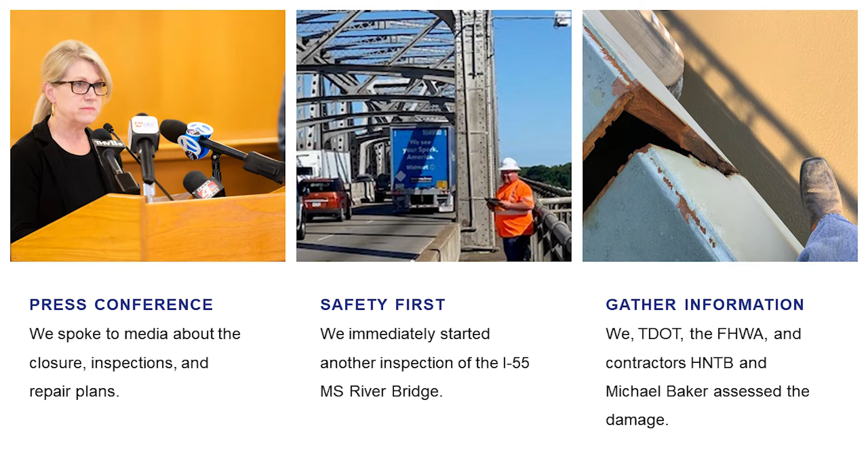The fracture of the I-40 bridge is a story that I'm sure piqued your interest, and I'm looking forward to telling the story from my perspective. This has been an event that I'll not soon forget and likely get to tell many times. It presented us with many challenges, and it showed us how things can work out successfully when teamwork and true collaboration take over. So to bring everyone up to date, as you know, on May 11th of this year, a fracture was discovered in one of the tie girders by our consultant inspection team, Michael Baker International. They were inspecting the truss and the cable portions of the tied arch spans of this bridge and found this fracture. The bridge was immediately closed to traffic.

The I-55 River Bridge, which we call the Old Bridge there in West Memphis, would be forced to carry the load of both interstates, a combined average daily traffic of about 87,000 vehicles with just 4 lanes of travel. So we go from 10 lanes of travel down to 4 lanes. Although ARDOT and TDOT don't have the authority to close river traffic, the Coast Guard closed barge traffic due to the level of risk and concern over the integrity of the bridge. As expected, barge traffic quickly backed up, including hundreds of barges with important cargo and fuel. I never thought I'd be dealing with a barge queue. I'm used to traffic queues, but now we got barge queues, and so that was pretty crazy.

We quickly scheduled a press conference and let the public know what had occurred and what we were doing to perform investigations into the fracture. ARDOT also immediately began another inspection of the I-55 bridge, the old bridge, to ensure it was safe for traffic. And within hours, on May 11th, we began forming a team of experts with FHWA, ARDOT, TDOT, our consultants, HNTB, and Michael Baker, and this team began assessing the damage. In fact, it was a Tuesday, about 2 o'clock, we got the call from Mike about this, and by the next morning at daylight, of course, Michael Baker teams were already there because they found the fracture, but I know Mike and Stuart were there before daylight. HNTB was called in, flew in overnight, and they were there at daylight the next morning to get this assessment started.

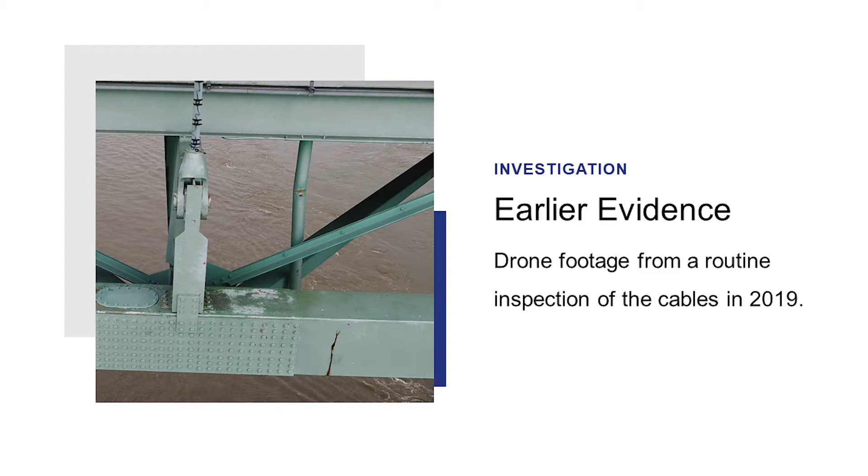A major key for ARDOT was to be transparent up front, to get information out and let the public know what was happening. So during the course of our investigation early on, we did find evidence of the bridge fracture from 2019 drone footage. We began investigating the cause of the apparent oversight of the fracture because we had inspected it since the time of this footage. So our investigation initially determined that the bridge inspector who conducted the inspection in 2019 and 2020 did fail to carry out their responsibilities correctly, and the employee was terminated.

We know this employee did not inspect this bridge as he was trained to do, but we also have to accept the fact that we've got to make improvements in our process. This incident, however, is not representative of our bridge inspection program.

Just in the few months that I've been in my current role, I'm sure not an expert in statewide heavy bridge, but I've known Mike and Stewart a long time, and I've got to know Andy Nanaman and Kevin Weston, who's, I believe, here today, and getting to see what these younger guys are doing and the technologies, to see the statewide repair teams, as I'm sure all you DOTs and consultants have seen, the amazing stuff that these teams that Stewart leads do every day.

Brad Smithy, I think, is here from our District 10, and unfortunately he's dealing with a lot of bridges almost on a weekly basis, having to close bridges, call in a team, take care of these things, whether it be heat straightening, pin repairs or complete deck replacements, and get that bridge back open in days. It's just amazing what they do.

But again, back to the bridge inspection teams, one of my closest friends at ARDOT retired about a week ago after 30-something years, but he was a bridge inspector for the majority of his career. And he was one of the persons instrumental in training me when I started in the field, and he taught me how to read plans. He showed me what I was doing wrong, where we formed things up wrong, and he served us faithfully as a bridge inspector for many years, and then went on to lead several maintenance teams. And he's representative of the many amazing bridge inspectors we have in the state.

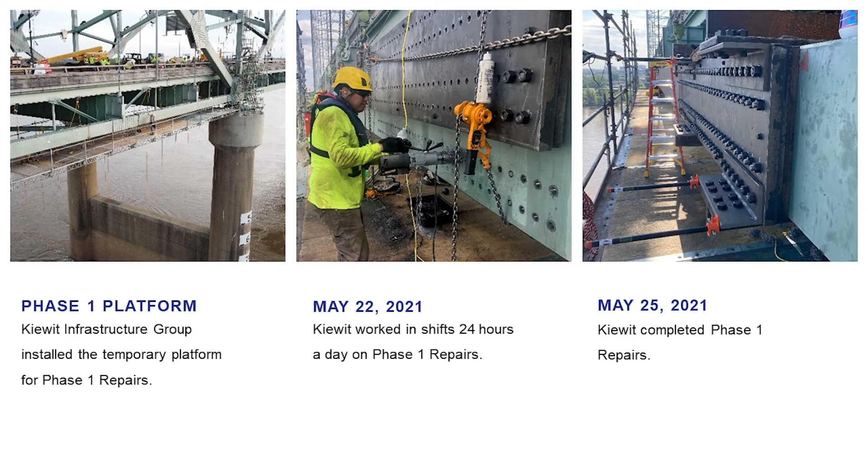They immediately mobilized crews and equipment to the site while steel plating was being fabricated. Kiewit worked 24 hours a day through the week, installing platforms, and then through the next weekend, drilling and bolting hundreds of holes on the outside and back plates, all to get this phase 1 repair to ensure the stability of the bridge.

The phase 1 repair was completed on May 25th, providing that additional confidence that the bridge was stable. So Kiewit Construction, when they were brought on in the design process, what was neat is they worked closely with the DOTs, with our consultants, and Kiewit's perspective from a constructability standpoint was a key factor. And the resident engineers and the guys that have worked as field engineers know that having that constructability standpoint is always very important, and it just makes everything go better.

And so it was just neat to see the contractor and the consultant working together side by side and coming up and tweaking final designs very quickly to provide the fastest and safest repair. So sitting from my vantage point, that was just amazing to see. They worked as one team, they put pride to the side, and they accomplished the task.

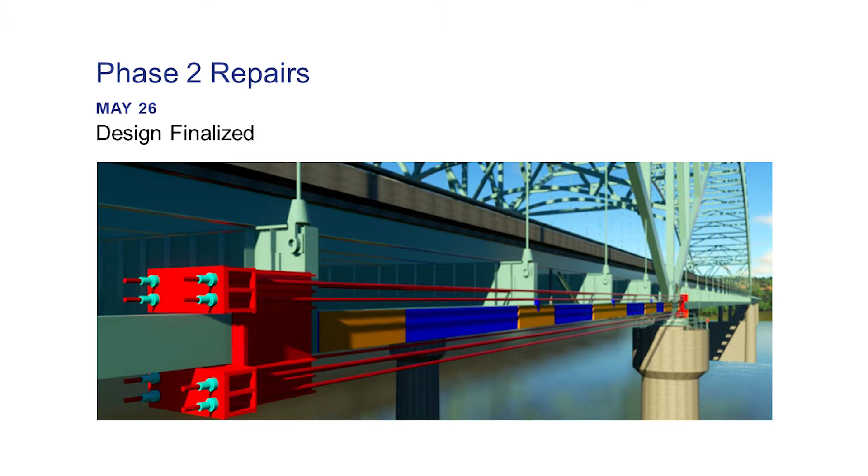This attached image shows the phase 2 plating. Orange and blue there's the plating over the old tie girder, the post-tensioning system that was used to reduce the load and engage the new plates compositely. So the structural engineering, the design, the execution of this phase 1, and then moving on to phase 2 repairs, and then we actually got into a phase 3. This is all very intriguing stuff.

Therefore, I'm going to leave the nuts and the bolts, pun intended, to Mr. Aaron Stover with Michael Baker to further explain that amazing feat in the next presentation. But before I do, I just want to explain a few more things. So while the repairs were going on, of course, we still had the rest of a bridge to inspect. Once phase 1 was complete and the bridge was stabilized, it allowed us to begin re-inspecting the remainder of the bridge.

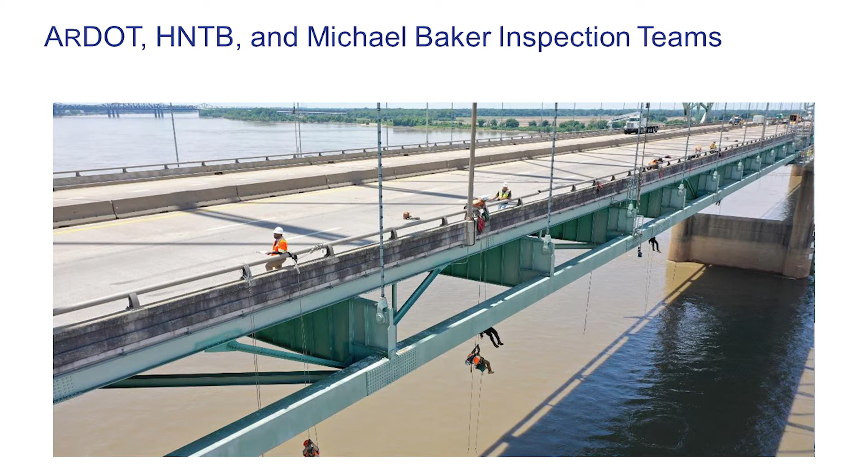ARDOT teams completed inspections of the remaining bridge outside the tied arch spans, while HNTB teams performed inspection of the deck down, and Michael Baker teams were completing their inspection of the trusses and cables. ARDOT also provided one of our Aspen aerial snooper underbridge inspection units to accelerate the work while other teams accessed the bridge by ropes. And you can see in the picture there in the back corner the Aspen there.

And so I don't know, it may not be a record, but this may have been the most inspectors on one bridge at one time. And we had people from all over the country hanging all over this bridge, including a majority of our staff. Because again, it's not just these two arch spans, which is a huge amount, but we got 2 miles of bridge outside of that, and we wanted to do a thorough inspection to make sure everything was in good shape.

While there was much attention getting the I-40 bridge re-inspected and repaired, we also had to focus on maintaining traffic flow across this 55 bridge. Traffic backups of 5 miles plus in each direction on I-40 and I-55 occurred on most days and continued throughout the peak daytime hours. Trips across the river were experiencing average delays of 1 hour. With any crashes or stalled vehicles, we had multi-hour delays. This would cause drivers to attempt to divert through town, causing further problems for local highways and streets.

I think they were doing the math that it was $2 million plus a day in road user costs just for the trucking industry alone, not to mention the impacts to the national and local economy. It was pretty rough. I know the ARDOT district forces worked quickly to add motorist assistance patrol vehicles, assist stranded motorists, clear stalled vehicles. Highway police units were working tirelessly to protect the queue with blue lights. And I know a couple of our guys here, Matt Emberton and Jeff Adams, they live this daily in West Memphis and had to deal with this traffic, and it was pretty brutal.

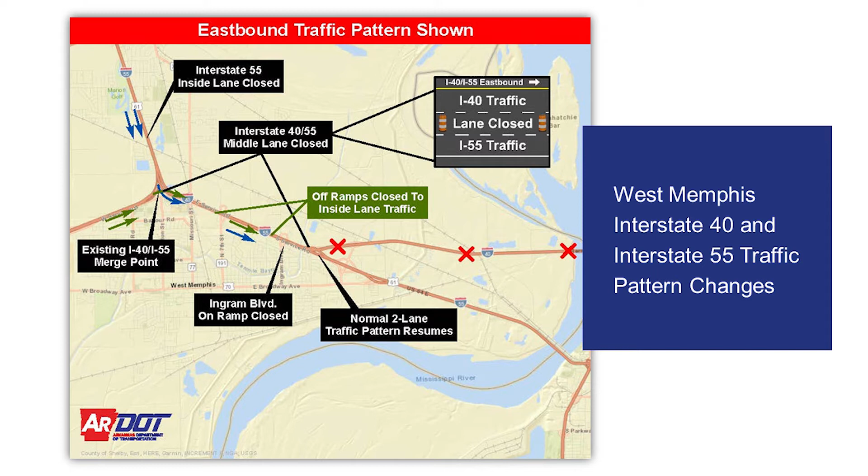As our engineers got together, the challenge was we were having the on and off ramp choke points, and we did something a little bit outside of the box where, as you can see up here, we had 3 lanes in the middle, and you would think, well, we don't want to reduce any capacity, but we actually did that very thing. So we shut down 40 to 1 lane before the west split. We shut 55 down to 1 lane before the split.

When we brought them in together, instead of merging them and all that ramp action with everybody in town, we actually separated the 2 lanes, closed the middle lane. It did take away some capacity, but it kept things flowing, and then we brought them into 2 lanes and across the river. And so we weren't really sure this would work, and the pressure was really high.

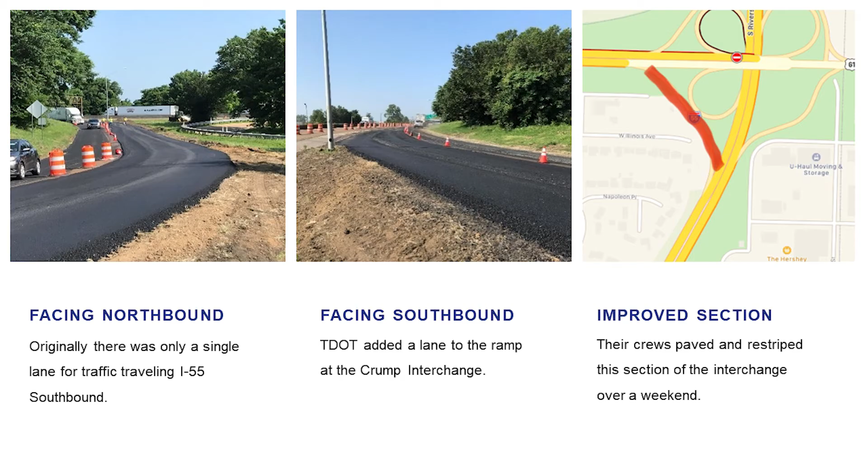At the same time, you've got TDOT there with that 1-lane Crump interchange. We knew that was one of the key players. And so TDOT had been working on moving utilities, widening drainage structures. Again, this wasn't a construction job. This was maintenance forces just in emergency action mode, widening out, and they were able to get a 2nd lane put in there and paved so that we could at least get that 2 lanes on I-55.

So the good thing is we get our traffic pattern changes implemented on the Arkansas side. The bad news is the day we introduced the new traffic changes, TDOT's in the middle of the road paving. And again, it's not their fault. They had to get this done, but that was the worst day we saw yet. So traffic turned into just a parking lot.

And of course, all of those engineers that come out of the woodwork said, we're idiots, we don't know what we're doing. The director's getting pressure. I think she said that was one of the worst days she had as director. Of course, the pressure's a little high on me and my buddies over in District 1, like, what in the world are you thinking? But we were still confident that we'd made the right decision. Our traffic changes were based on solid engineering judgment, and we knew they would work.

So we were trying to explain that, hey, give it a chance. Let's let TDOT get out of the way, and let's see if our changes worked. And so there was a lot of confidence that the director had to instill in us to not pull the plug on this, and we were very close. I'm proud to say that it did work. We saw much improved traffic flow with these changes.

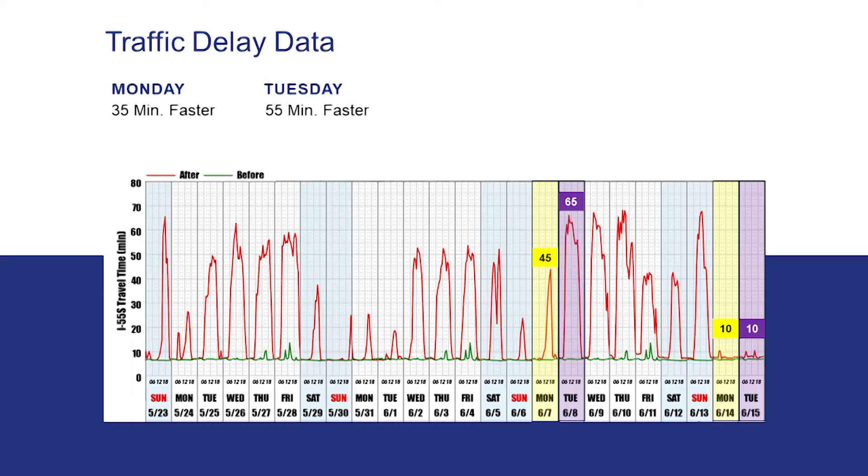And actually these traffic delays, that peaks out about 70, 80 minutes, but really that's just to a certain sensor. And so when the delays go back 5 miles, it doesn't even pick up on the chart. So we were seeing outrageous delays. But once TDOT got their work done, that was Friday, Saturday, Sunday. Actually, we let them take off a little bit Friday early, and the peak hours weren't bad. Monday morning is when we really got to reveal, hey, here's what our changes are.

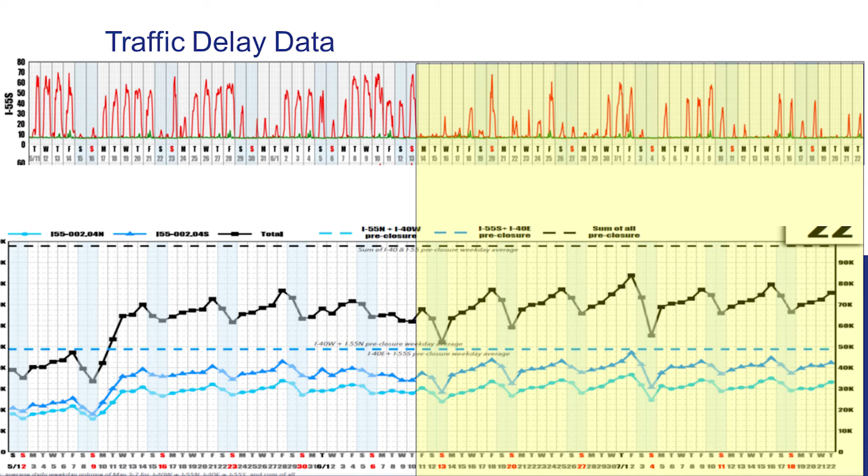And then you got throughput. So this bottom chart is actually showing throughput. So you've got 87,000 vehicles a day plus, of course, with 5-hour delays, trucks and vehicles are going to reroute. They were going to Caruthersville, they were going to Helena, they were going to Greenville. They were finding any way around, and so the traffic volumes had dropped here in the 60,000 range. So 20+ thousand vehicles were finding a way around and costing a lot of money. Once our changes were implemented, the beauty of it is, okay, now there's no congestion. Well, now 20-something thousand vehicles are all coming back into this. And so, but it still worked.

And once our changes were made, you could kind of see the peaks climbing, and we got back up over 80,000 vehicles. In fact, on July 1st there, we peaked out almost at full capacity, even had a little bit of delay, but the throughput was a record throughput. So it was just amazing what happened there. But even what was more amazing was reopening this bridge. So on July 29th, we did some load testing, got that completed. Crews removed platforms, demobilized, and we opened eastbound lanes on July 31st, westbound on August 2nd, about an 83-day closure.

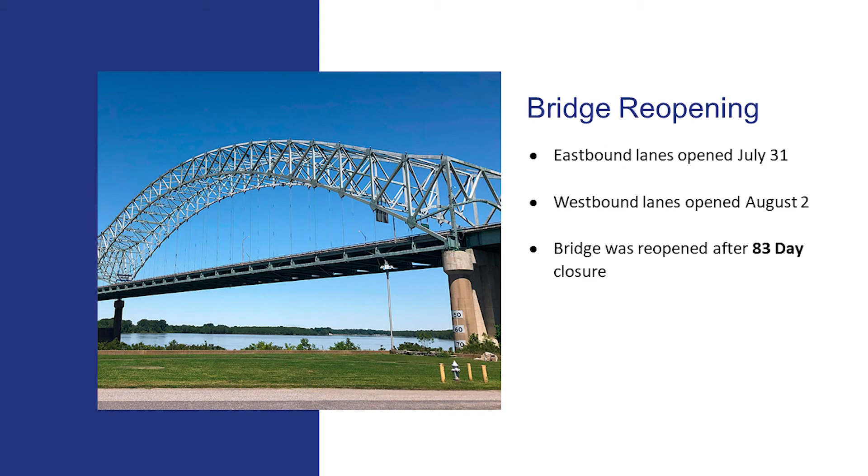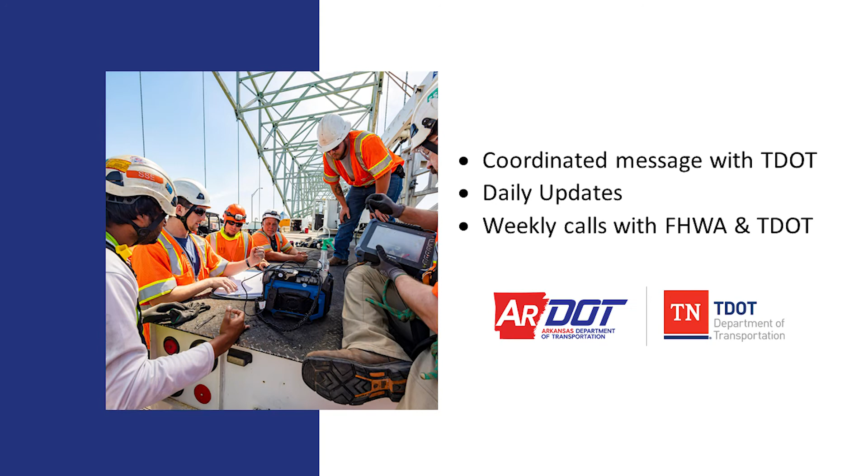So I have to say again, the key component of success was the constant communication and teamwork with TDOT, FHWA, our consultants, our contractors, the teams in the field as they communicated here, as you see in the screen, in traditional ways, working off the tailgate and the toolboxes. The benefit of COVID, as you all know, was the remote work and the comfort level that we all had doing that. And so after coming off a year of remote work, the rest of us, as Eric said, what do you say, 60 people just on his team. And that's just one of them from around the nation daily.

I was on calls with these guys 3 times a day, but I could do it from my office, get out in the field some, but it couldn't be done without that support staff. And so everybody could work from their home, from their office, join in on those daily meetings and make everything happen. And so I don't know really what we would have done without those web conferencing capabilities and the comfort level we had in that. I think this quote sums it up. If everyone's moving forward together, then success takes care of itself, from Henry Ford. And that was certainly the case with the I-40 bridge.

So that concludes my portion of the presentation. Stay tuned for part 2. This is the really interesting engineering part, those nitty-gritty details that I can't give, and I'm gonna let Aaron do that, and then if y'all have got questions, we'll hold those to the end. Appreciate it.